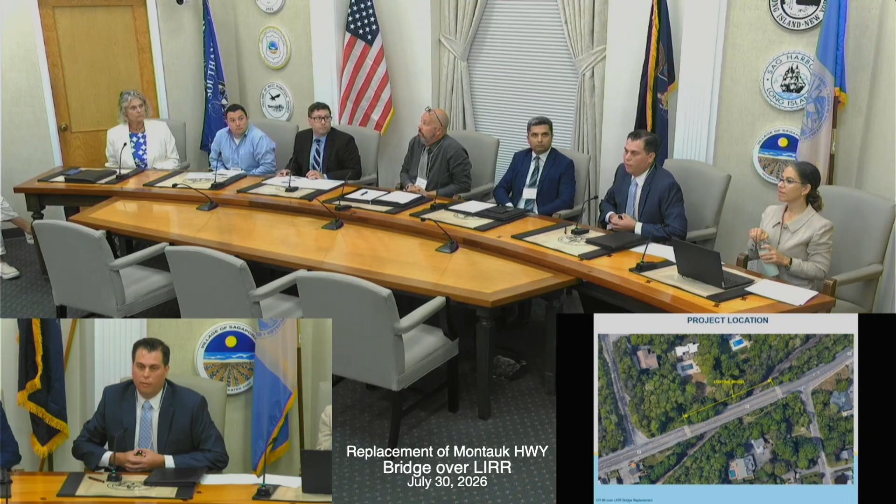Another issue we're dealing with on site is a lot of existing utilities. There are high-tension power lines that run along the railroad corridor to the south. And one thing that is not immediately evident is a buried utility corridor that is on a very unique alignment. It starts on the north side of Montauk Highway near Old Riverhead Road, runs along the north, then crosses under the existing bridge and the existing railroad, and then runs along the south side of Montauk Highway.

The image is a bit small up there on the screen, but you can kind of see there's somewhat of a tree clearing there where this critical utility corridor runs. This is a National Grid gas main. It feeds the entirety east of this site, and it's also a Hampton Bays Water District water line. These cannot be disturbed. They will not be disturbed. We're building around them. We're maintaining them in place.

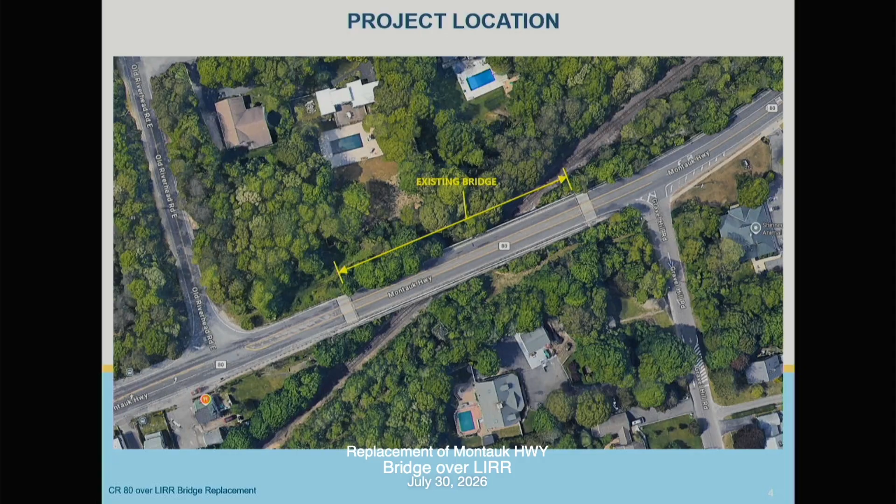Another challenge of the site is the extremely sharp skew of the railroad under the existing bridge. You can see that here. The geometry is very unique. That presented a lot of challenges for the original structure that's there now, and it will present a lot of challenges for us as we work around all these existing features that are on site.

If we just jump down onto the roadway itself and take a look at it, Montauk Highway at this point is on a vertical curve. That's to get us up and over the railroad to provide clearance for the trains underneath.

We have the existing sidewalk on the south side of the structure. And I'd like to point out the two girders that extend above the bridge deck. These are the main two supports for the entire bridge. There's one protruding up there near the sidewalk, and then there's one on the far left side of the screen. Those are about 8 feet deep. They run for the entire 330 feet of the bridge, and they support the entire thing.

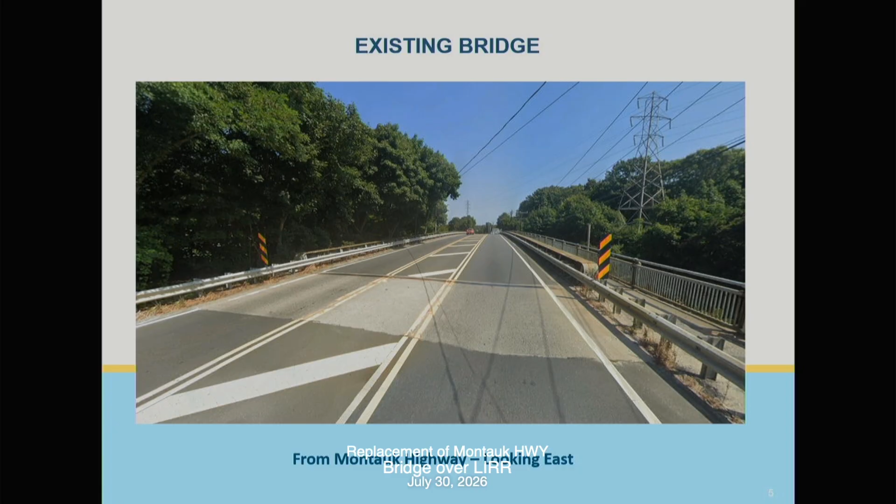Here's a view of the bridge that most people don't see, maybe the train conductor. We're looking at it here from the underside. You can see the individual and staggered piers. There are 8 piers here. The bridge is actually a 5-span bridge.

The piers that we're looking at are staggered to provide horizontal clearance for the railroad right now as we're looking down the track. They're also staggered to miss that utility corridor that's running perpendicular to the track, running from that northwest quadrant to the southeast quadrant.

I think this image is useful. These rail workers are kind of standing right where the gas main is. That gas main runs down a steep slope, crosses under the existing track, and then runs back up the other side of the slope. You also get somewhat of the sense of the scale of this structure. It is massive. Demolition of it is going to be a challenge, and it is very uniquely supported with those staggered piers.

So why do we need to touch this bridge? It has really reached the end of its useful service life. It was built in the early 30s. It was rehabilitated in the late 80s. As Kyle mentioned, it is the lowest rated bridge that's maintained by the county.

We have ongoing steel section loss. We have concrete encasement deterioration. The bearings no longer function properly. It's inadequately detailed for seismic events. That sidewalk that's on the south side is only 4 feet wide, which is substandard.

And the bridge is posted for no trucks with our permit. These are vehicles that exceed normal legal loads, but at one point, this bridge could support those loads. That's a symptom of engineering evaluation, and it's been determined that it can no longer support those loads, and that will continue as the bridge deteriorates.

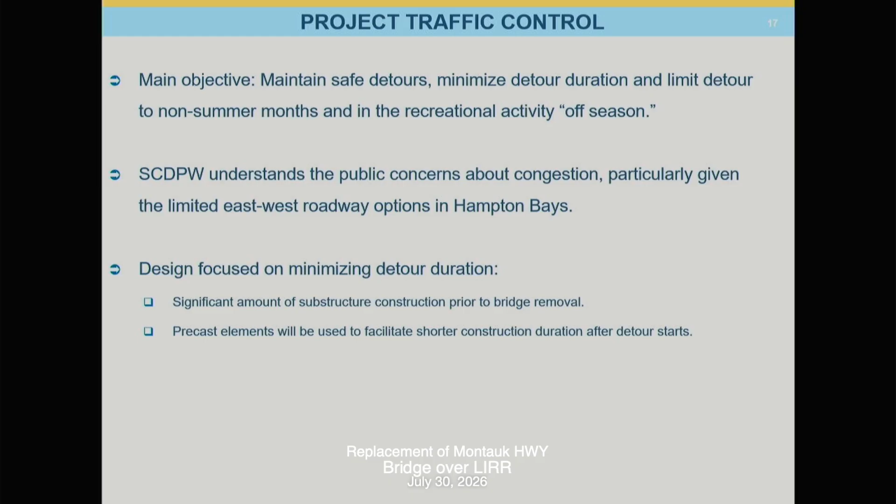We also obviously had the US Open and the ongoing Sunrise Highway construction. Fortunately, that Sunrise Highway work will be long completed by the time this project comes around, knock on wood. And we don't have a major golf tournament either. So hopefully those things are working in our favor as well.

Looking at the schedule, we do expect the contractor to be out there on site for up to 2 years. That start would be basically 3 years from now, summer of 2029. But the detour itself wouldn't start until fall of the following year, over 4 years from now. Again, there's a lot to do on the underside to prepare this site to accept this new structure configuration.

The estimated time for them to be off-site is summer of 2031. They can get the roadway reopened and go finish up some things while traffic's back on the bridge away from the site. So that's your 2 years.

So it looks like 7 to 8 months of closure. The way I think of it is just after Labor Day and hopefully well before Memorial Day. Of course, a warm winter would be helpful. So if anyone knows any tricks for that, that would be good.

In order to facilitate the traffic movement through this detour, we're proposing temporary signals at Ponquogue and Fanning, at Wakeman and Fanning, and at Canoe Place and Fanning. That should help facilitate movement through this corridor.

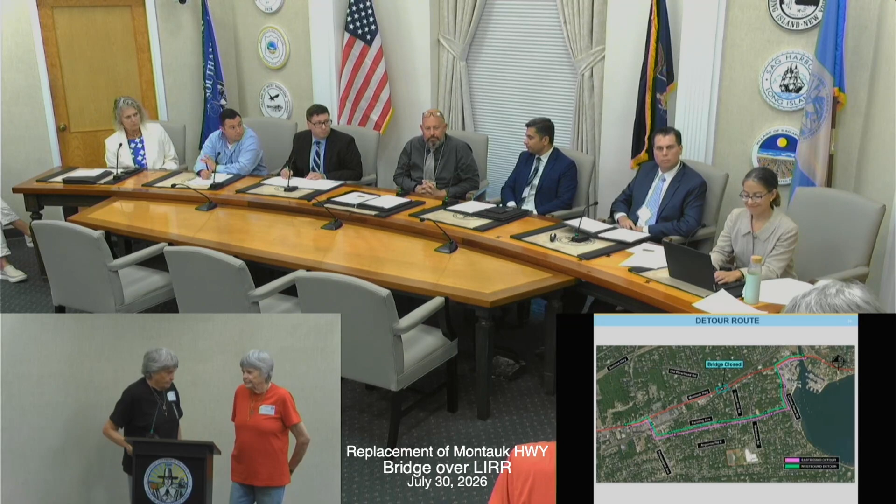Hi, my name is Gail Murcott, and I live in Hampton Bays too. I would just like to say, maybe if you went back and looked, it's an excellent suggestion, two things I want to say: keep the traffic on Sunrise Highway. Hampton Bays, I don't know if any of you have sat there and looked at the traffic from like 3 o'clock till 8 or 9 o'clock at night, it's just a dead stop. We can't take any more traffic than we already have.

So if you would look at keeping people on Sunrise Highway and closing that exit to Hampton Bays, I think that would be a really good thing to stop the extra added traffic that's just passing through. The second thing I want to say is, if you're going to have a weekly meeting, it would be a great idea to have someone from the town of Southampton attend that meeting so they could voice what's best for our community. That might not be in your regular practice, but it's a great idea because their interests are our interests.

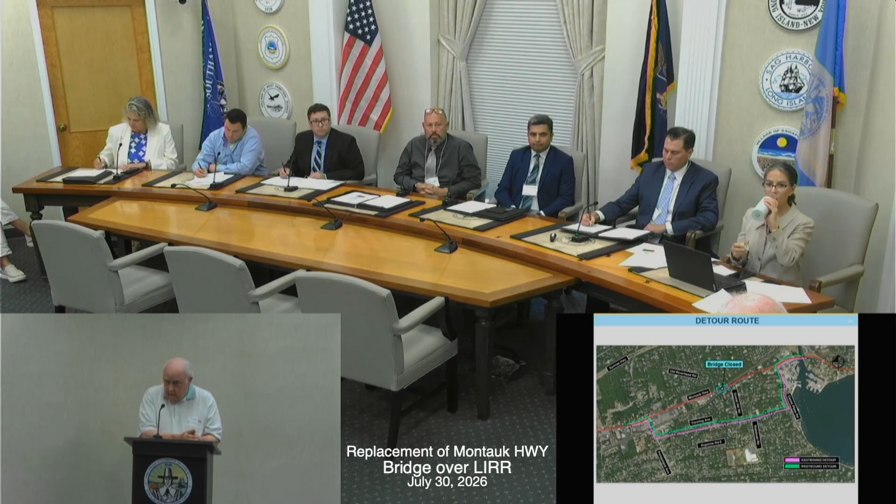I don't know whether class restrictions are applicable. You can move business traffic to various times of day, commercial traffic, residential traffic. I'm glad to see our highway superintendent is here, that there undoubtedly will be cases for emergency vehicles to try to get through. And traffic is gridlocked, as it is, year-round, in the morning and evening.

So I just urge you to really look at some unique, creative solutions that you can add to what you've already done. Thank you. Thank you for your comments. Okay.

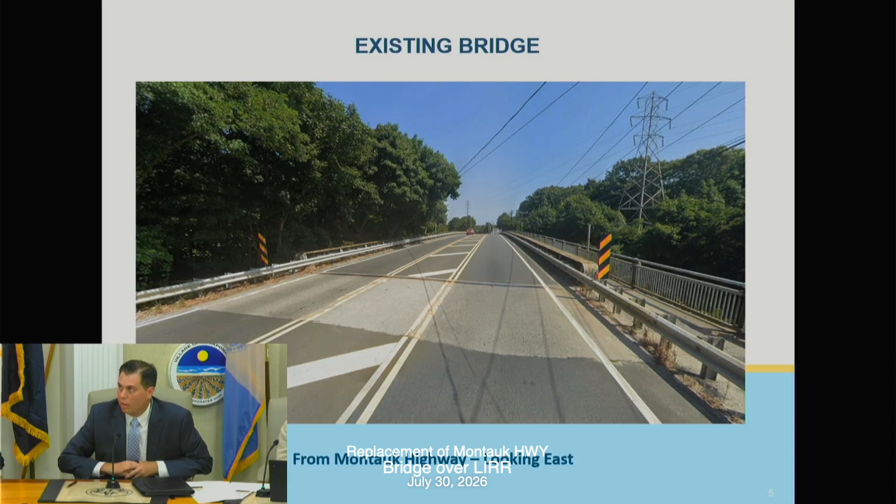Here's a view of the existing bridge from the roadway deck, one lane in each direction. Sidewalk on the south side. The bridge is on a vertical curve. That vertical curve gets the roadway up and over the railroad. I want to point out the two girders that extend above the existing deck. Those two girders support the entire bridge structure, about a 330-foot long bridge.

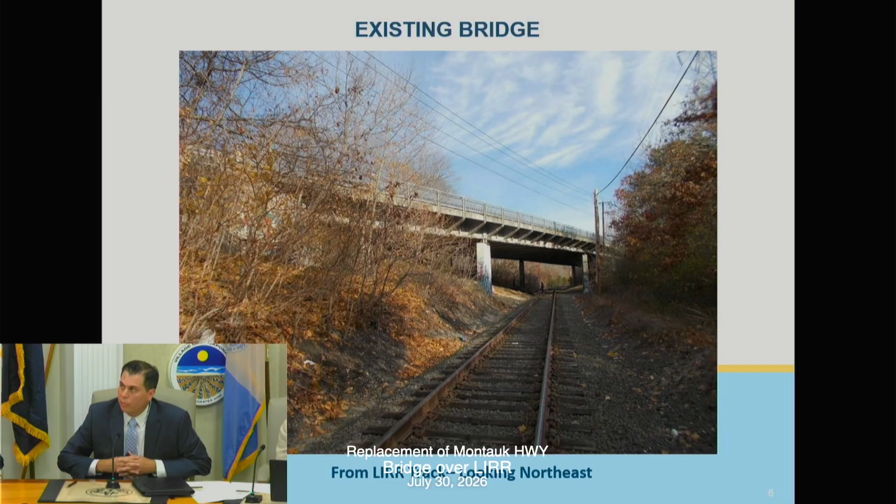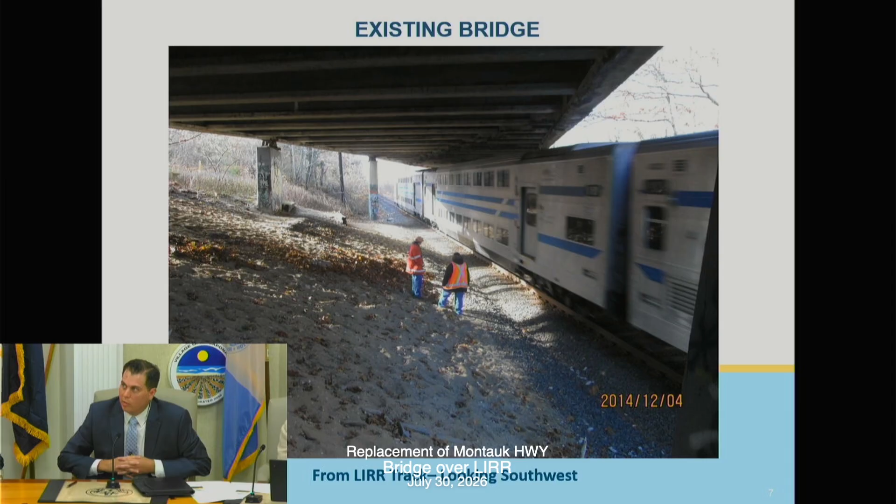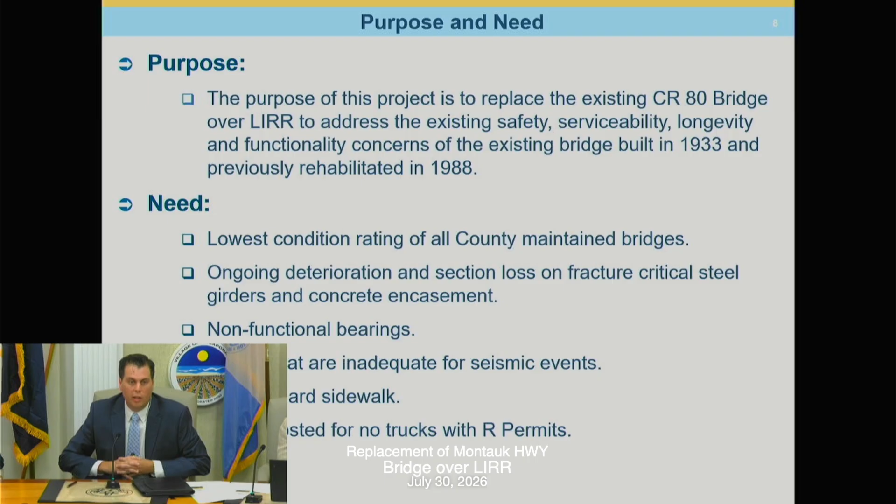Why do we need to touch this bridge? It is nearing the end of its service life. It's been out there for a very long time. It's deteriorating. Ultimately, we're replacing it for the safety of everyone who uses it and travels underneath of it.

The bridge was built in the early 30s, rehabbed in the late 80s. It is the lowest rated bridge maintained by the county. We have ongoing steel section loss, concrete deterioration, the bearings don't function. The details are inadequate for seismic events.

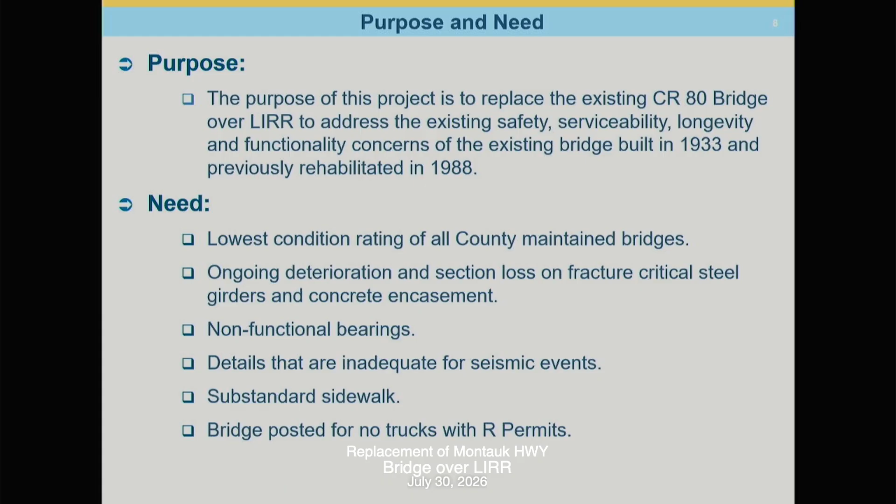There is a substandard sidewalk on the south side. It's not wide enough. And the bridge is posted for no trucks with R permits. These are vehicles that are beyond normal legal load, but this bridge could carry them at one time. It's been evaluated that it can no longer support those, and that will continue as the bridge continues to deteriorate.

Some photos of some of the steel loss that we're seeing. This is an image along the sidewalk of the south side of the bridge. These vertical stiffener elements of the main girders, there's complete 100% section loss at those members. These girders are 8 feet deep. Again, they do support the entire structure.

And this is what we can see. There is a lot of the steel that's actually encased, and we can't get eyes on it.

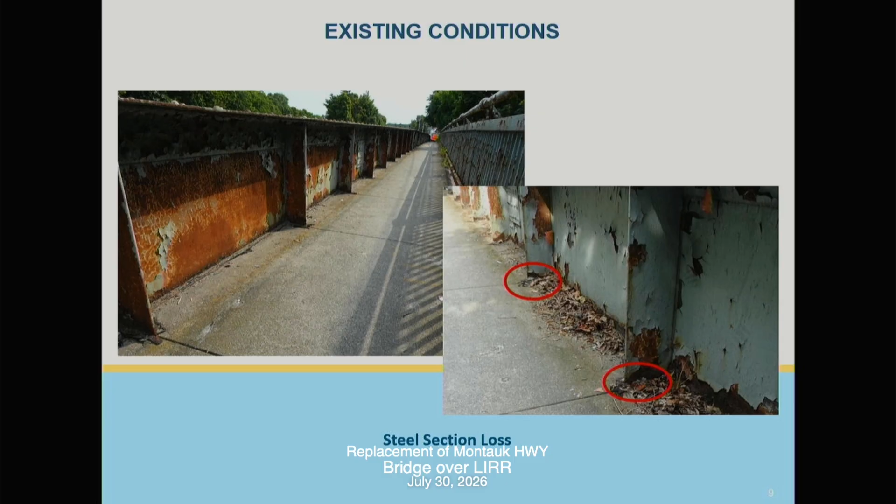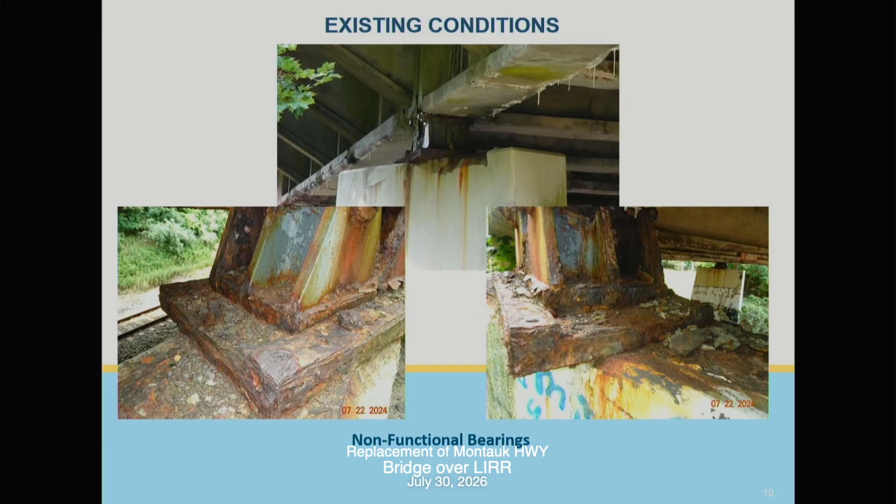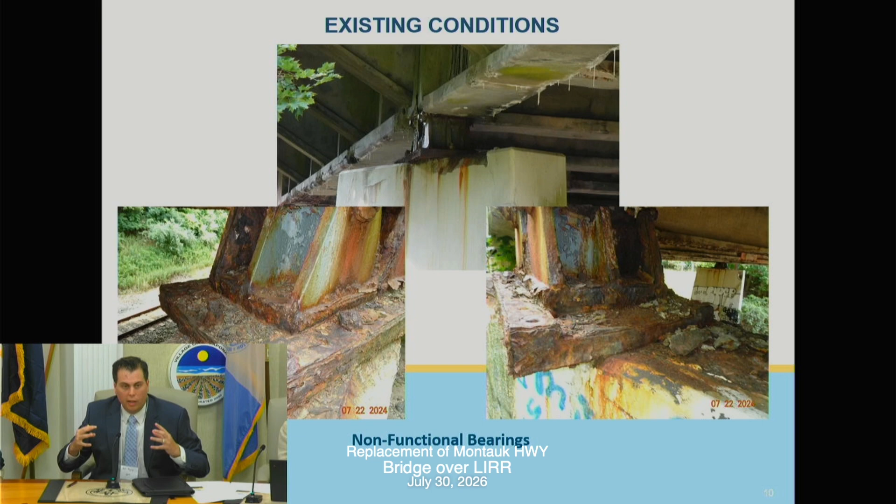Bridge bearings allow the bridge to expand in warm temperature and contract in cold temperature. The bearings in this condition are completely frozen; they don't allow for that movement. The sliding surfaces are bound up with pack rust. The bridge still wants to move, and that generates a lot of force that is supported by the existing structure and substructures.

So what are we proposing to do with the replacement structure? We're proposing to eliminate the safety concern that is the existing bridge and install a new structure that meets current standards. On the top side, we're going to still provide one lane of traffic in each direction with a sidewalk on the south side, to meet up with the adjacent east and west existing features as it is now.

We are also going to repave the area we're working in between Gravel Hill Road and Old Riverhead Road, and provide some additional clearance to the railroad as best we can. We can't provide much additional clearance because the bridge is already on a vertical curve that's basically maximized for the adjacent side streets' sight distances for drivers. We can't make that a steeper hill. Critically, those buried utilities on site will remain in service throughout construction, and we'll be working around them.

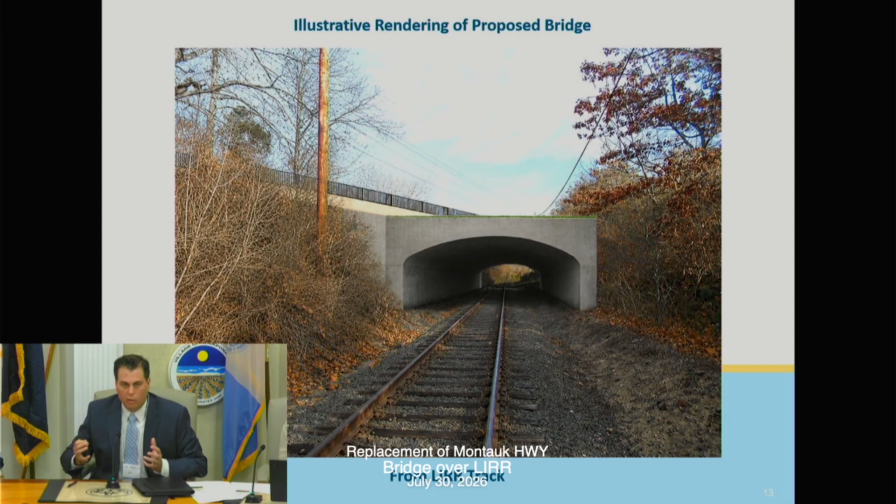Another benefit of this roughly 50-foot span is that railroad operation should not be impacted. We're far enough away that trains can continue to run even though we're excavating on either side of the tracks. Once those pieces are in place, it'll form the 50-foot span, and everything will need to be filled with earth, compacted, and the roadway reestablished.

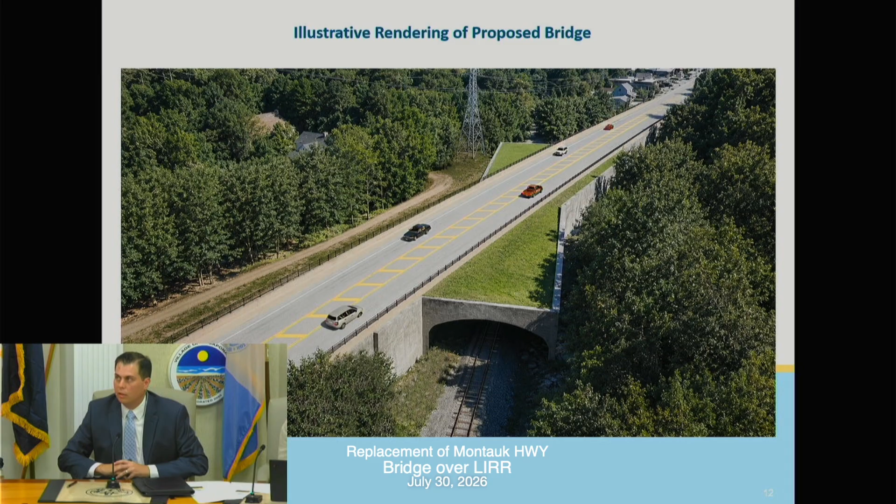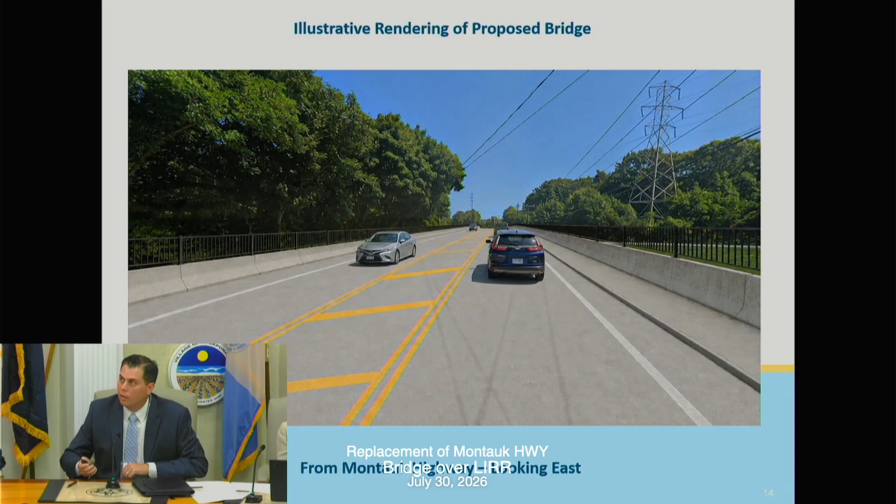In the final condition, this looks very similar to the roadway you're used to now — median in the center, one lane each direction, and the sidewalk on the south side. We do have some additional room to provide extra sidewalk and some additional shoulder. That's gained because we're eliminating the girders currently above the deck that take up space. We're not widening the overall structure; it's still in that footprint, but we're giving back some of the horizontal room the girders are currently taking up.

This is a little small to see here, but this is an engineering section of what that looks like. It's a 5'6" sidewalk on the south side; currently what's out there is only 4 feet. This detailing does not prevent installing a sidewalk on the north side in the future, if that happens east and west of this bridge via other projects by other people — you could easily install a sidewalk there. Currently there's nowhere really to connect the sidewalk to.

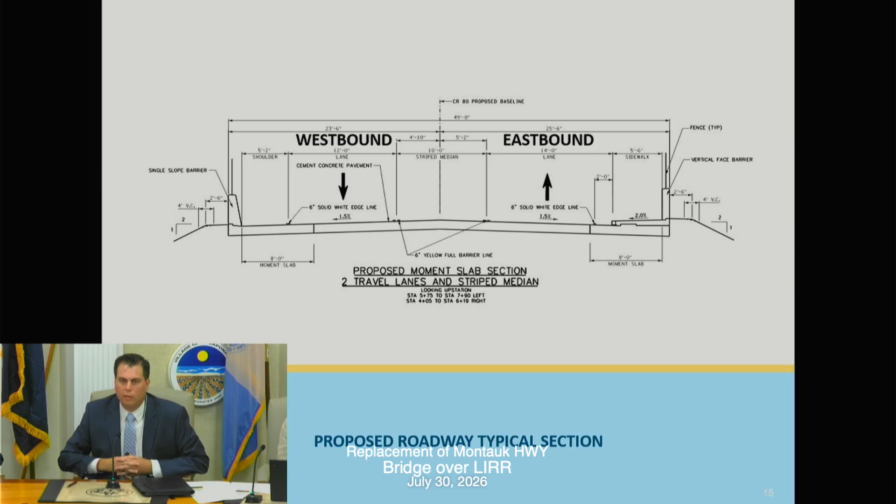So why the need for a detour? I think it really has to do with the framing of the existing bridge. What we're probably all used to seeing is when a bridge is replaced, traffic is often shifted to one side — half the bridge is demolished, the new bridge installed in its place, traffic shifted to that new section, then the other half demolished, and the project finished and opened up.

That's called stage construction. Unfortunately, due to the framing of this bridge, stage construction is not feasible. Two girders support the entire bridge, and floor beams run perpendicular to traffic, supporting the entire deck. As soon as we remove a floor beam or a girder, this bridge can no longer support traffic.

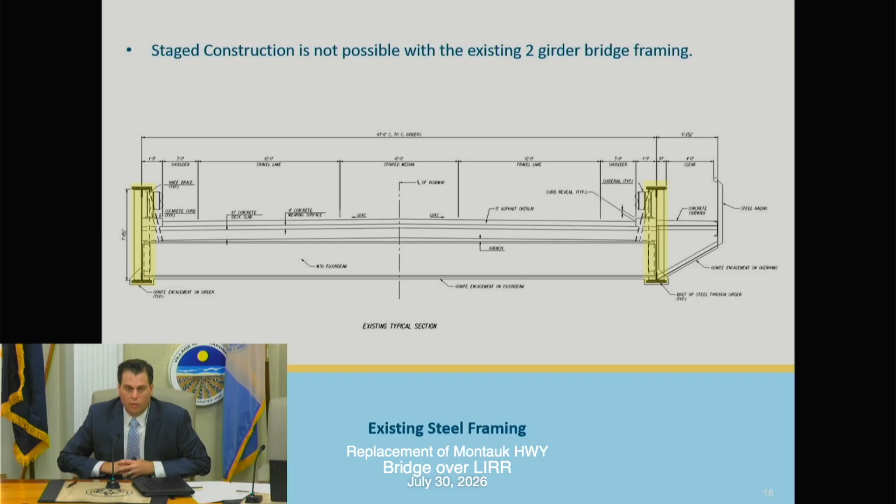That's not the only way we maintain traffic. We do install temporary bridges where we can, and that was thought of and vetted here — we did look into temporary bridges. I'm going to jump back to the actual site.

To install a temporary bridge, you have to realign the roadway locally to put the new section of roadway either north or south of the footprint you'll be working in. The skew of the railroad makes that incredibly complicated here, but primarily, that very critical utility corridor exists in both the northwest quadrant and the southeast quadrant of the site, which effectively spoils both alignments. There's nowhere to put foundations for a temporary bridge.

Additionally, right-of-way is also a concern. Any kind of realigned temporary structure would have right-of-way impacts. There is a bit more room on the north, but there's a very important historic site, the grave site of Reverend Paul Cuffee, just off screen, about 300 feet away from our project. A realigned roadway would have potential to get closer to that site than we want. We are going nowhere near that site, we are not impacting it in any way, staying 300 plus feet away with any of our work.

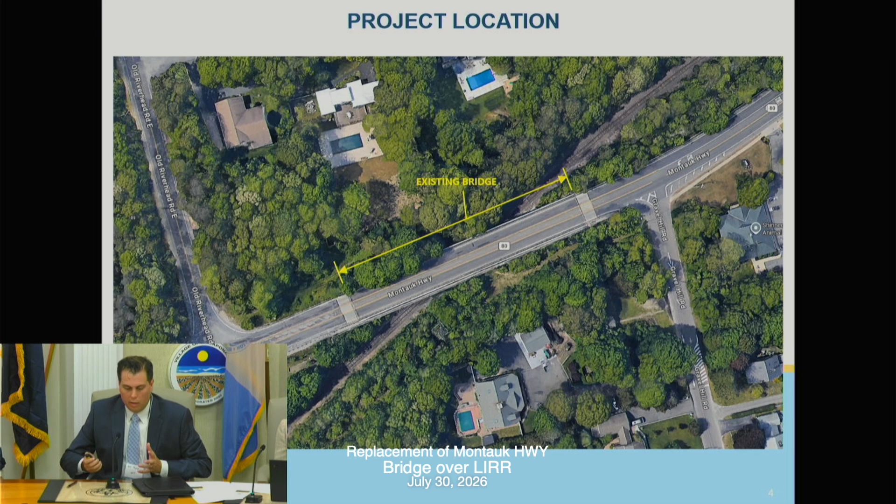So we can't install a temporary bridge due to all these reasons, and we can't stage construction due to the bridge framing. That does unfortunately leave us with the need to detour the roadway. Of course, the primary objective is safety in everything we do, in all of our design. Minimizing the detour duration is also a major driver of this project. It's really why this type of structure is being advanced.

The ability to construct so much underneath, a year plus of construction prior to the detour, building as much as we can while keeping the bridge open, and utilizing those prefabricated elements once the bridge is removed to allow the contractor to move as quickly as possible. We understand the importance of summer. We are scheduling the detour for fall, winter, spring, starting in fall. And that's not the easiest time to do construction work, both earthwork and concrete work. So the structure type itself, the difficulty of working with a bridge above us, and the difficulty of working in winter, that's all being done in order to minimize that detour duration and the impact of summer.

We certainly understand the concerns about congestion in the area, we've heard them after our first presentation. It's a very difficult corridor. There are very few roadway options, east and west. Only Sunrise Highway and Montauk Highway cross the canal. And traffic does need to move around locally along this route, and it needs to be signed to allow that movement.

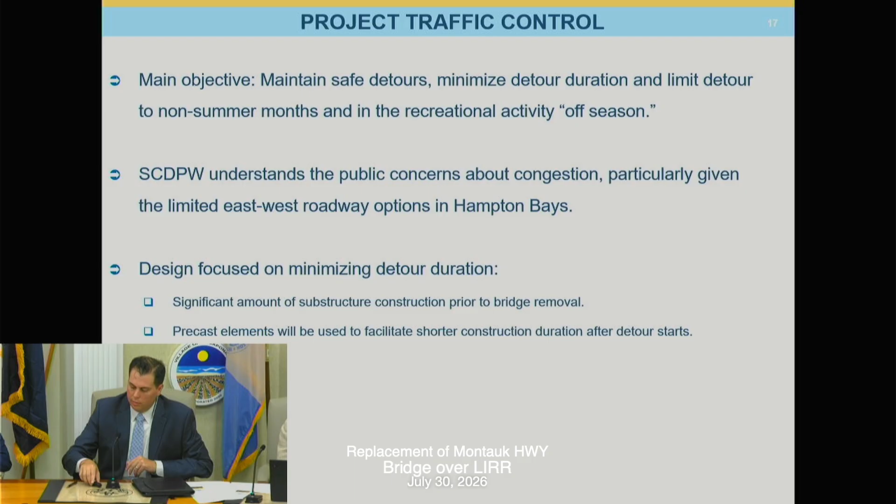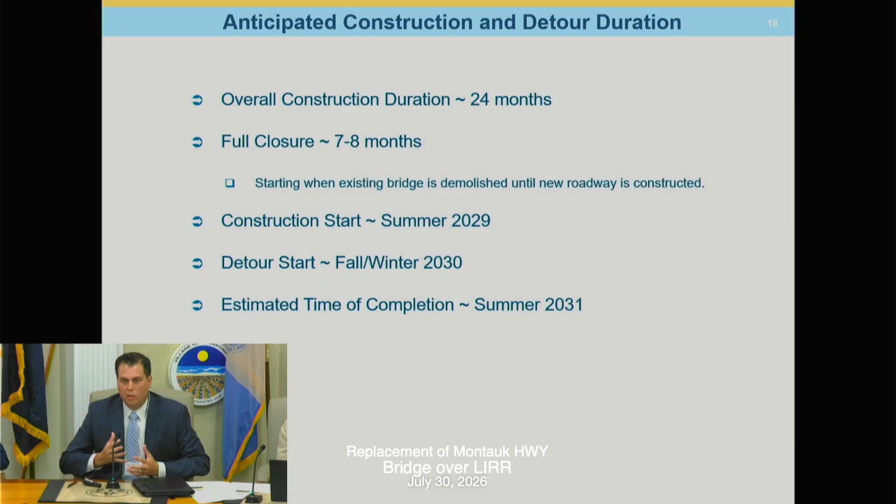So the schedule: construction start summer 2029, about 3 years from now, with the detour not beginning until fall of 2030. So that's over a year of construction, doing as much as we possibly can underneath the bridge prior to the detour, which is projected to take 7 to 8 months. That is accounting for difficult winter weather conditions. Hopefully it's a warm winter and the detour could be shorter than anticipated. We expect the contractor to be off-site in the summer of 2031. So that's your 2 years of construction. That doesn't mean the roadway will still be closed in the summer - they need to go take care of some things away from the roadway after it's reopened.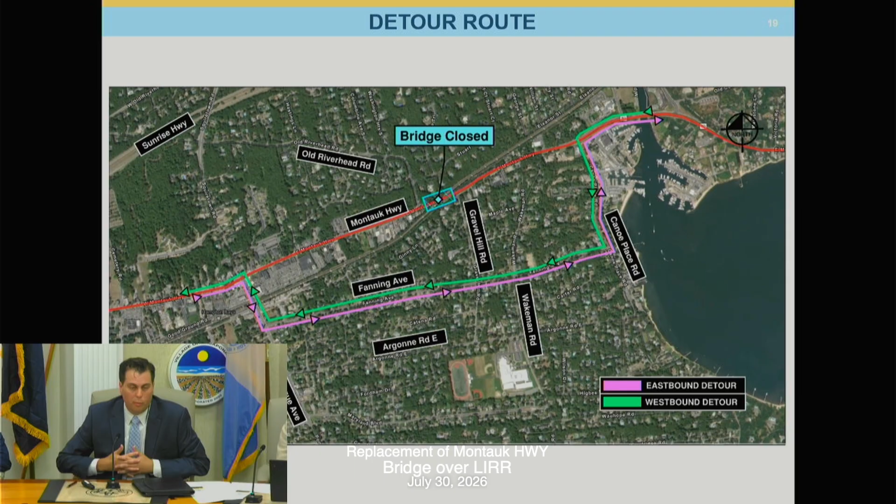The detour length is relatively short, but that's really not that important because it is the duration. Current traffic models project approximately 10 minutes of additional travel delay during peak hours. It's just not accurate, nowhere near, and local feedback tells us that may not be accurate.

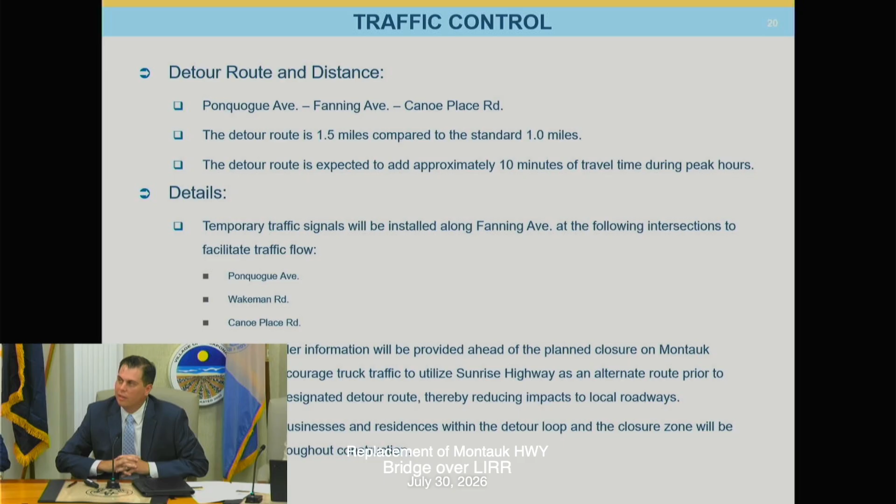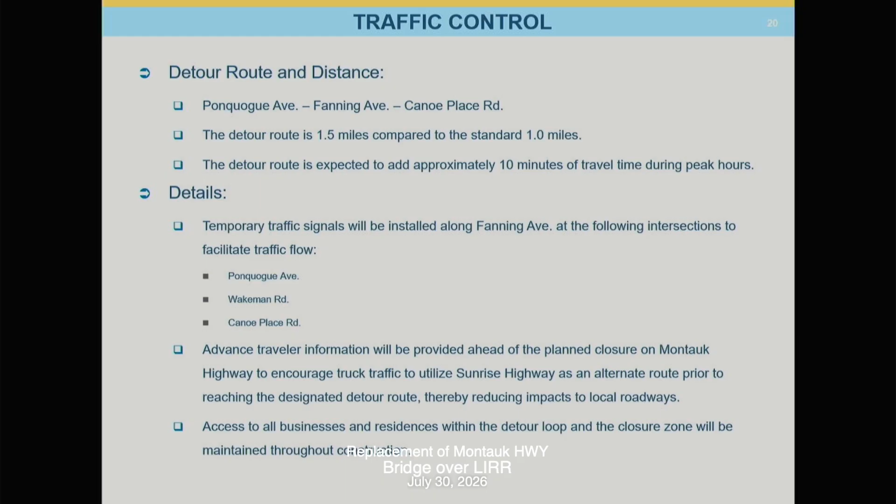But we are going to provide advanced signage east and west of the site that alerts people this is in place, and is going to encourage folks who are on Sunrise Highway to stay on Sunrise Highway to get through this corridor, and encourage folks who are on Montauk Highway to find Sunrise Highway. So we don't anticipate that the full traffic that would have been on Montauk Highway will utilize Fanning. All businesses and residences within the detour loop and the closure zone will have access maintained throughout construction. So those businesses that are very close to the site, near Old Riverhead Road and Gravel Hill Road and along the whole stretch, will be accessible - you can drive down to them and access them.

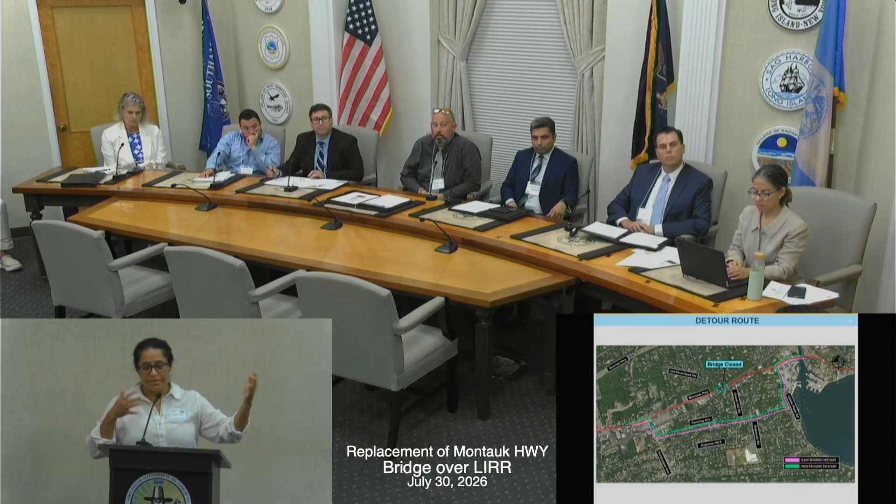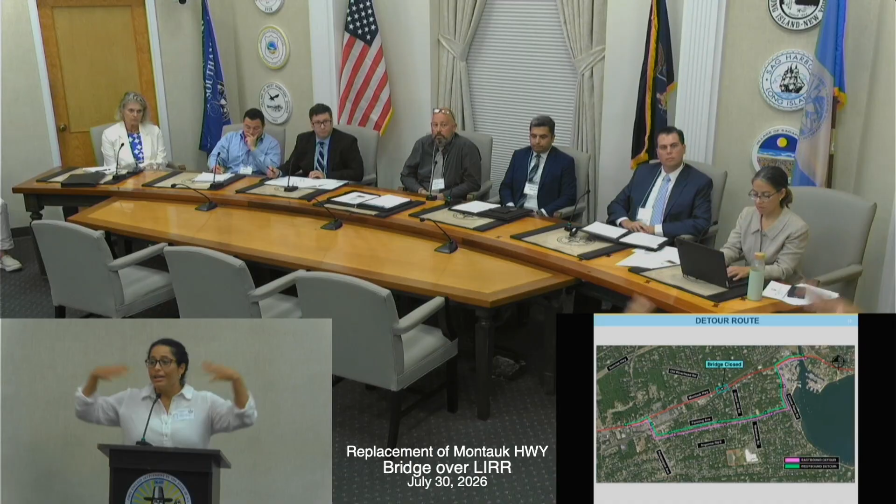The other thing I wanted to say - I know the other bridges are also experiencing deterioration, some were closed. Quogue was closed for a little bit, and obviously Ponquogue. So diverting traffic from Montauk Highway to look for other alternatives down to Ponquogue, that's also going to be an issue because of weight limits. So consider that the impact is not just about the people here tonight - I've heard a lot from Hampton Bays, but this is a bigger impact than just Hampton Bays.

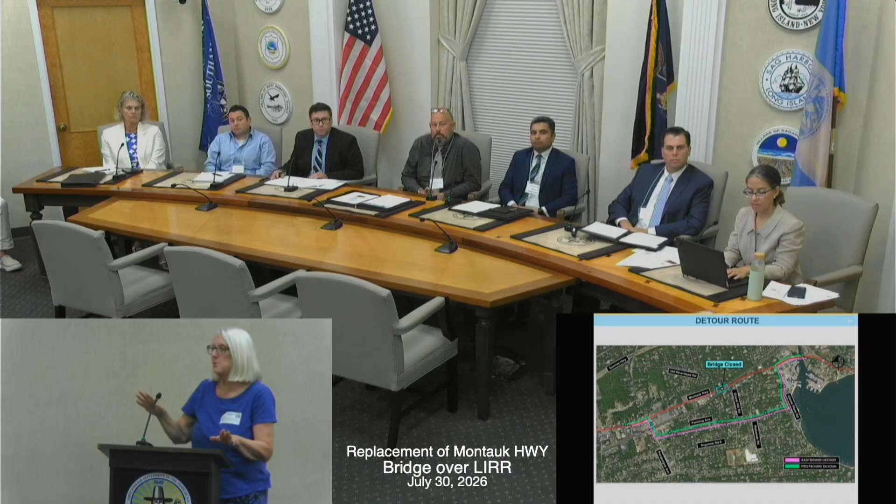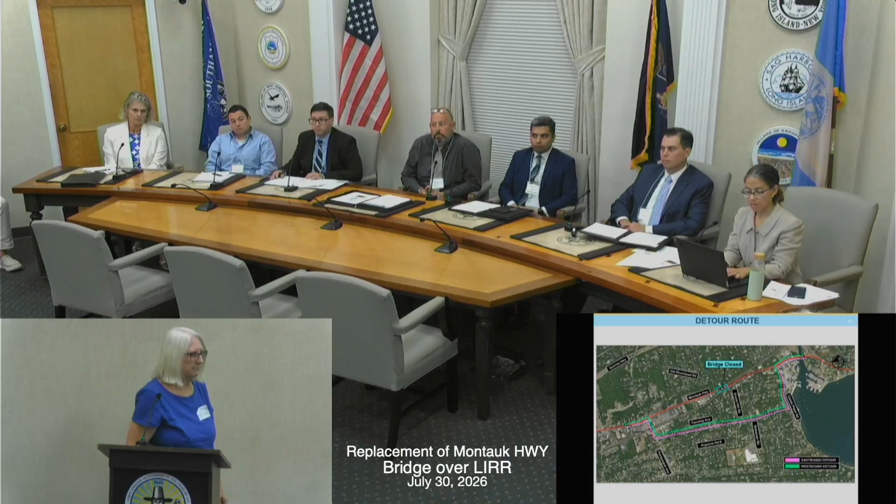I live in Hampton Bays off of Shore Road, which is another road they come through and get backed up on. My problem is going to school in the morning when they were doing the bridge over County Road 39 - it took 55 minutes to get from Springville to the school. That's no Montauk Highway, no Sunrise Highway, 55 minutes. That's ridiculous, for Springville to the high school, which is almost 2 miles. 55 minutes, because everybody's going into those feeders to get to Canoe Place Road.

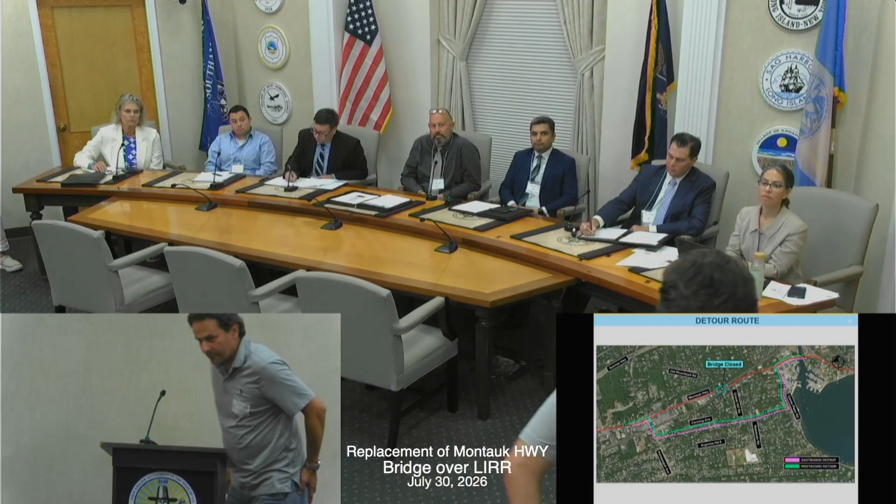As I said before, I'm on Fanning Avenue, my name is Michael Patek. My question is, are you planning to work with all these apps, like Waze and Google Maps, to tell them - because I'm sure it's controllable, it's software - are you planning to talk to them to make sure they're not sending people through any other streets than the detour you create? So we don't fill all the other residential streets, because I think we can control the developers.

We do involve the apps when we're closing a road or closing a bridge. I don't know that we can direct them on where to send cars, but we'll certainly try. Maybe you can tell them there's a weight limit, and try to tell the apps to send people this road, not that one. And I would like to go back to that emergency situation.

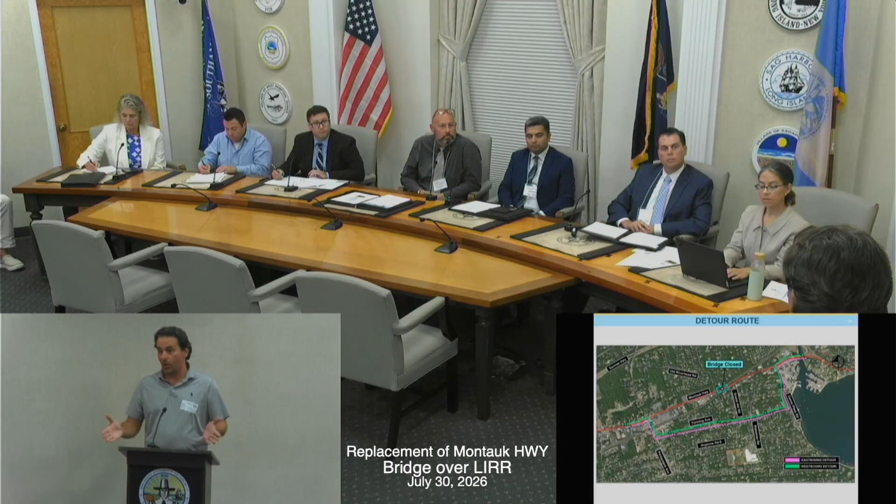So if the fanning is used for east and west, and it's a dead stop in both ways, then there is no ambulance getting to it. So my question is, have you considered that fanning is only used for heading east or west, and another street is used for the other direction? So you actually have the option to get a fire truck there, get an ambulance there. You have Argonne Road, we have Newtown Road, and I think that would help with the noise and the emergency situation. If I had my house on fire, it's a scary thing. And if you know that the fire truck is not getting there because the road is only wide for 2 cars, then you're just going to watch your house burn. So I think you guys should consider that too.

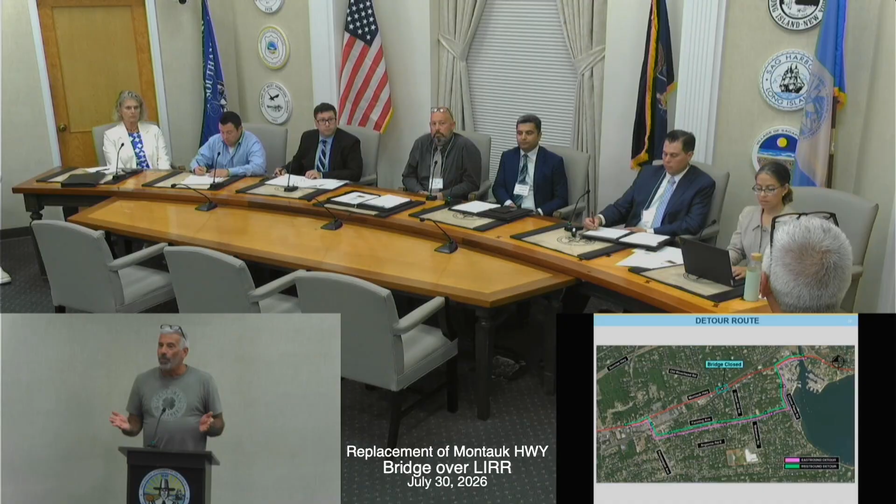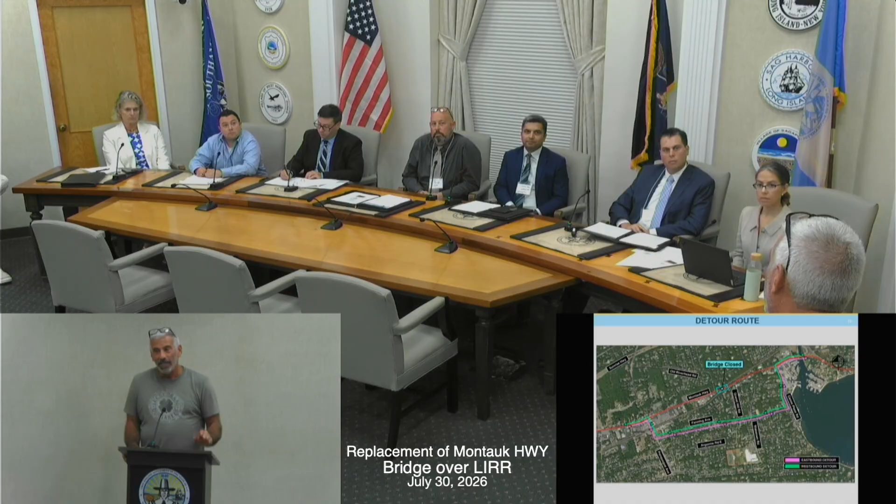So we are three years away. I think the best plan would be to keep all commercial traffic off these streets. If a landscaper is pulling his trailer, he can go on the North Road and go around, or get off and do what he has to do in Hampton Bays, but he's not going down Fanning, he's not going down Argonne, he's not going down Maryland. It's the only way it's gonna work. These poor people that live on Fanning Avenue, they're getting destroyed now.

You send 6,000 more vehicles down that street, you have a big problem. Anyway, good luck, let's raise the property value, right? If I try to sell my house right now, who am I selling it to? Who's buying a house where you can't get out of the driveway in the morning?

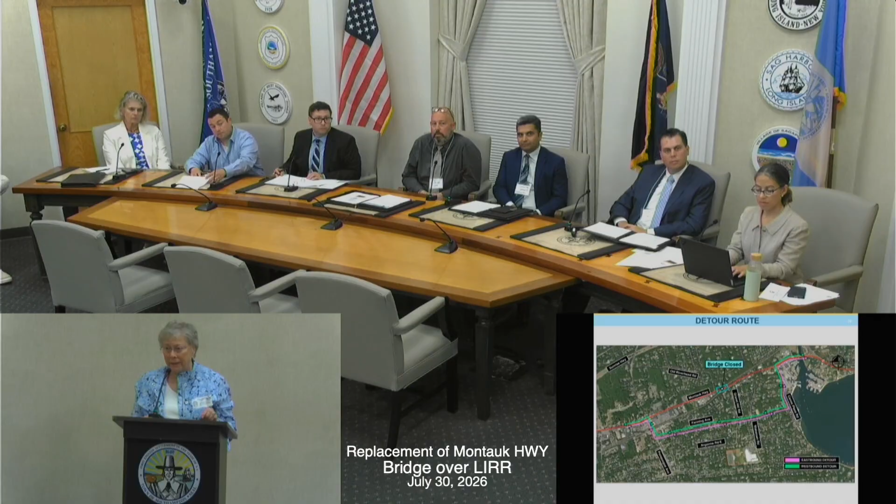Hello, my name is Marilyn Wilson. Hello, Ann. I'm a retired teacher from Hampton Bays. I've lived at my residence for almost 35 years on Argonne Road. I have seen the traffic increase over the years, so it's now backed up to my driveway. I also talk to teachers still in the district. As a retired teacher, I don't have to go there anymore.

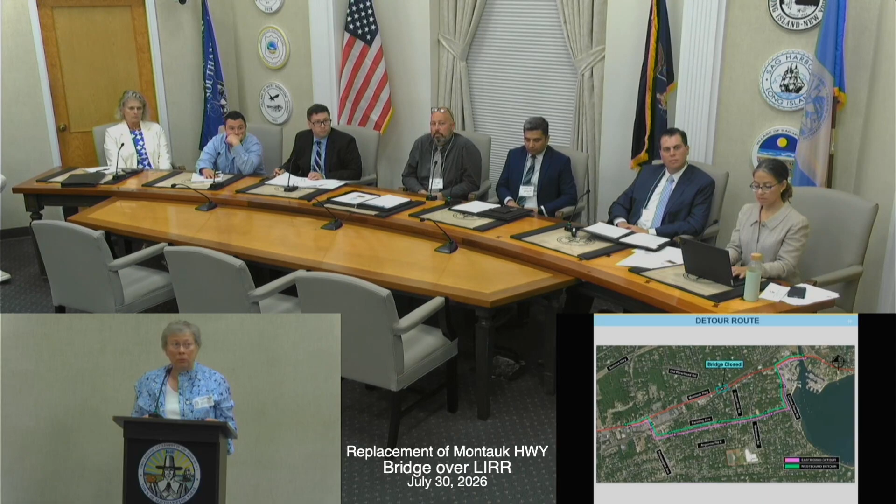But they, as others have said, are coming down Dune Road so they can get to the schools in Hampton Bays on time. That's in the morning. Maybe at night it's a little easier, but it is a real struggle because so many teachers don't even live in the district anymore, and they have to get there to work. So people have already talked about Fanning and touched about Argonne because of the high school, but you have all that traffic now trying to come down Dune Road and then filter into all of those streets, and it's a serious problem. It really needs to be looked at for the parents, for the teachers, for the staff, and the students. Thank you.

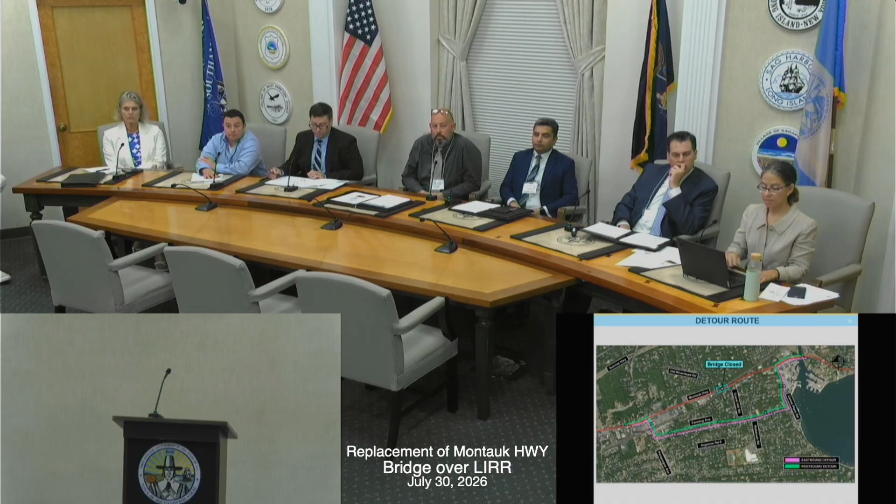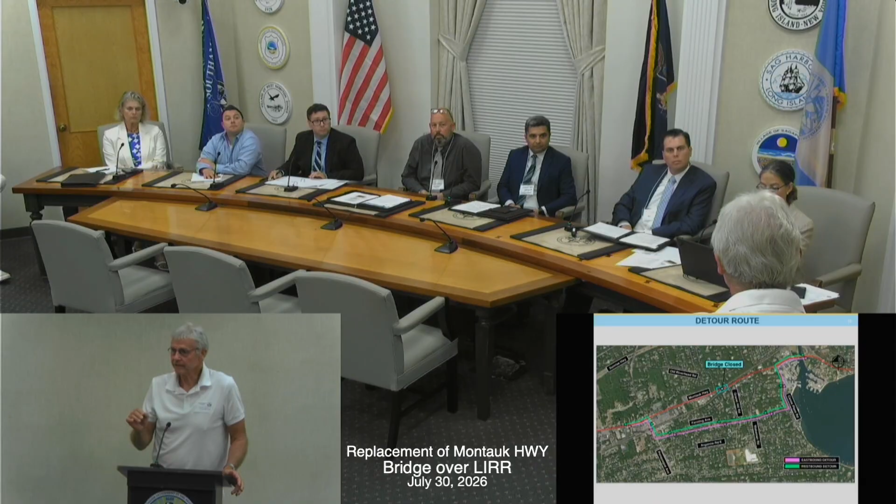My name is Russell Wilson. I'm a resident of Hampton Bays. I live on Argonne Road. I just wanted to step up and echo some points that were made about Newtown. I know you said you were going to put some traffic lights in to handle some of this. And as everyone's aware, everybody looks on their phone, oh, here's a shortcut, here's this, that. It used to be just residents knew the back roads. Now everybody knows the back roads, so all of the merges are getting filled up no matter where they are.

But Newtown Road, people are going to use it regardless, but it's a little congested right now. If you eliminate the eastbound traffic because the bridge is going to be closed, why couldn't you put a light at Newtown? Let those that want to go up to Gravel Hill go to the right, but make it so it's easy for everybody that uses Newtown Road, when their light is green, to move across the bridge. It seems simple, but why do they have to make a U-turn? Why can't we clean that up and just let them make a left right away? That's it, thank you.

Thank you for that question. All right, we're going to go back to questions and comments in the Zoom. One is a follow-up about the guardrail and the proposed sidewalk. I understand that a guardrail between the proposed sidewalk and the road is not required based on the speed limit for the existing road. However, it is rare that vehicles on this section of road travel at speeds less than 30 miles an hour. They typically travel at 40 to 50 miles an hour. With this in mind, for safety purposes, shouldn't a guardrail be provided? If not, how will vehicle speed over this section be controlled?

Our design does account for the speed that people actually drive on the road. It's not actually based on the sign speed, it's a study of how fast they actually go. We'll take this comment and have our highway engineers who review these kind of safety features study it. That'll be submitted through the DOT design process, and they'll also evaluate it from their perspective as well. Thank you for that question.